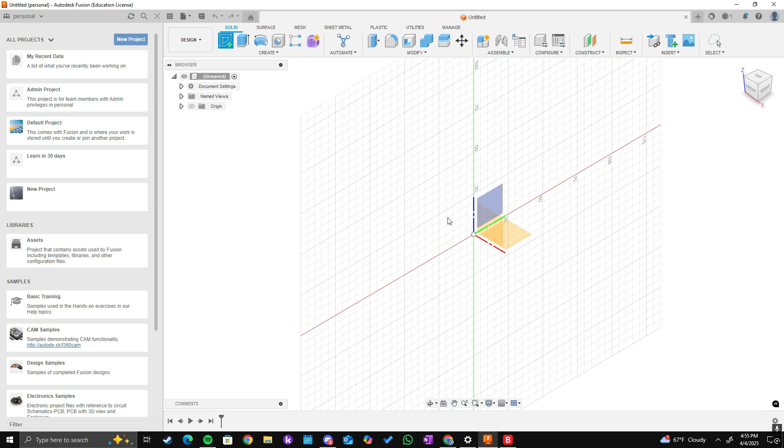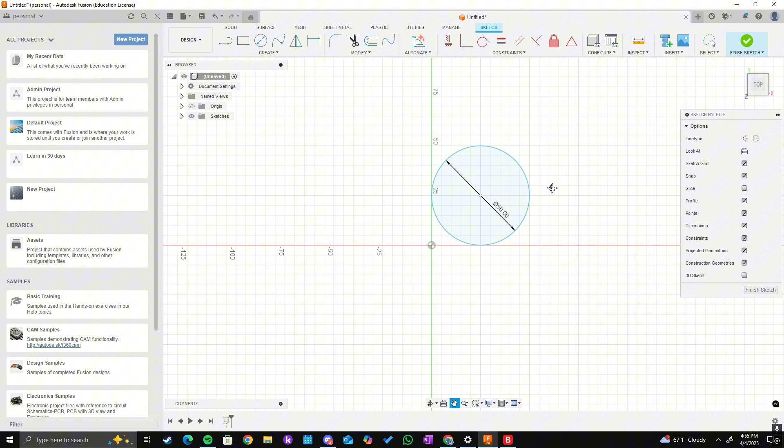Let's click circle. Because we're gonna be making a gear, we need the base circle. So let's plot our first point, and let's do 50 millimeters. There we go. Now we have our circle that has 50 millimeters. Now we could have gone through the sketch tab up here.

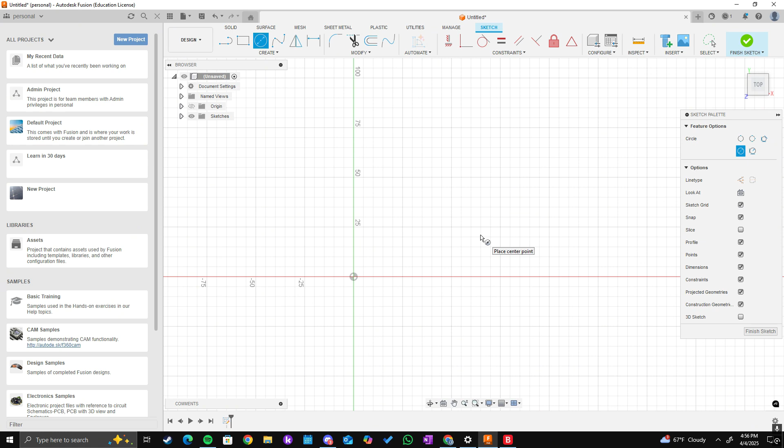However, a different way to do it, and honestly the way we can navigate this easily and quickly, is if we delete that, we can type S for search, and then we can type circle. We go down to center diameter circle, and then we can plot. So let's do the 50 millimeter circle. There we go. Alright, so now what we need to do is make the teeth of our gear.

So we click line, or we can search it, but since the line tool is right there, we'll just click through that. Let's plot our first points, and then let's do the other side. Now it's not perfect, it's a really quick ragtag tooth that we're making, but it'll do for now.

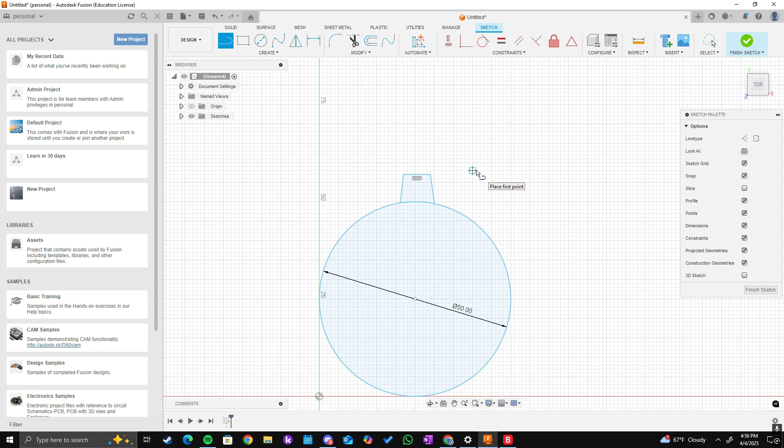Alright, so now you would have to essentially create all of these teeth equally in the same size at the same distances around this circle to make the gear, but that just takes a really long time and is going to be really difficult to do perfectly. So what we can do instead is type S, circular pattern, and click that.

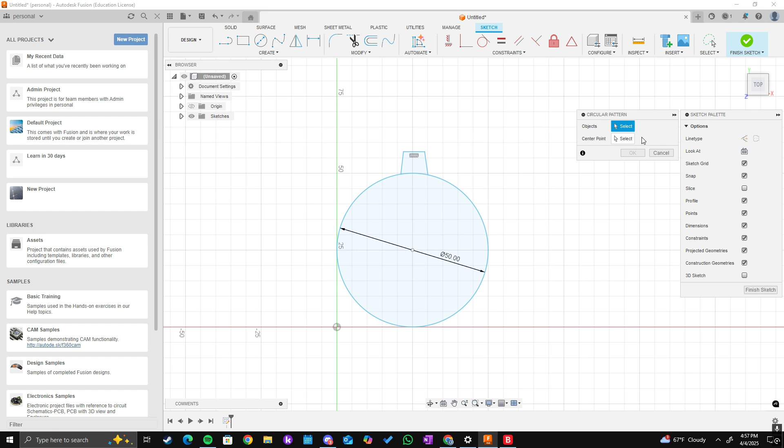So now we can select our objects. So we select this, and then we have to select our center point. So we select our center point over here, and now it shows 3 different teeth. A gear obviously is probably gonna have more, so let's delete that, and let's try 12.

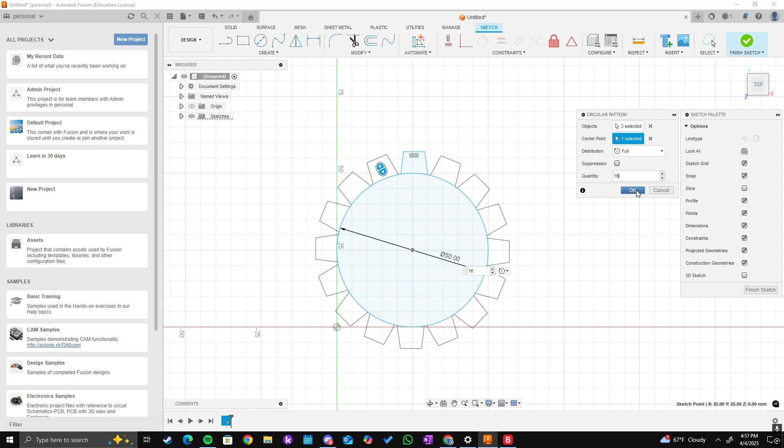Okay, so I think 12 works, but let's do 14. Alright, so 14 works pretty well. But I think we can add maybe a few more. Let's try 16. Alright, there you go, perfect. So now we click OK, and we have essentially 16 teeth on our gear.

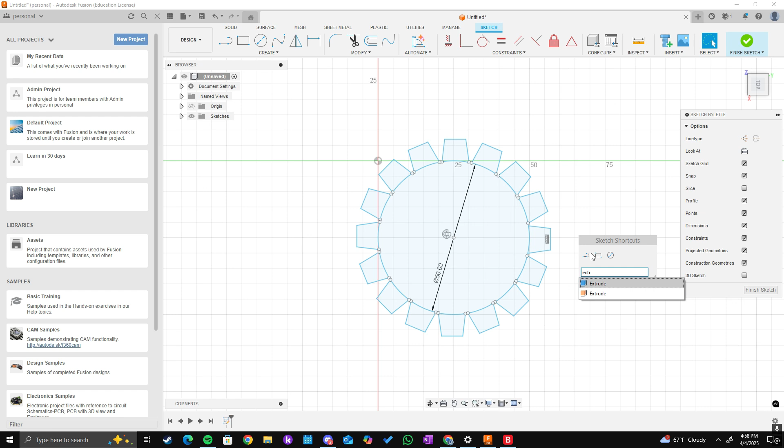However, you notice that this gear is only 2-dimensional, and you can't actually make anything with it. So we can fix that by extruding it. Extruding essentially takes it out and lengthens it. I'll show you. So we type S, extrude, right here. We click whatever faces we need to extrude. So we can just select the whole gear.

Wait, let's type that again. Extrude, select the entire thing, and let's type 5mm for extruding. We extrude 5mm. So we set OK, and there we go. Now we have our gear that's extruded out.

However, you notice that if we want to attach it to something, there has to be a hole in the middle for you to attach it to. So we can do that by two different methods. We can extrude a circle in the middle, but that's just going to take a really long time. So what we can do is we can do search and type hole. So we go to the hole tool.

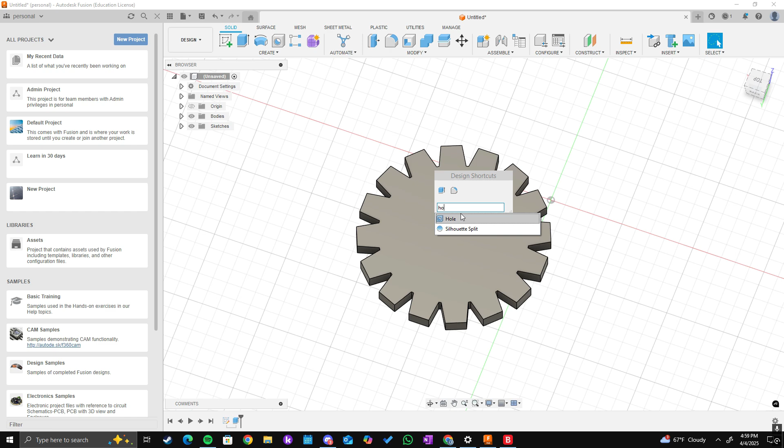Let's just select our frontal face. And let's hit hole. So let's go to the middle. That's the middle of our thing. And I have a preset of 5mm at a 25mm depth. You can set that to whatever you want, but it'll essentially create a hole through the entire thing. So let's go back to the top view, and let's hit OK. So now you can see that we have a screw hole to attach the gear to whatever motor or whatnot that you need to attach it to.

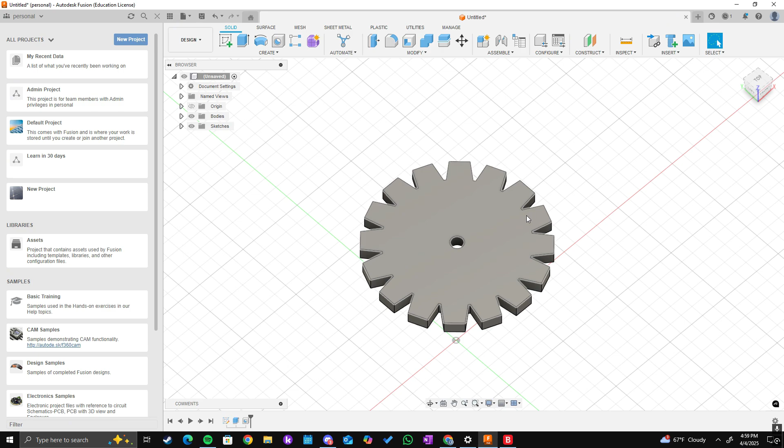So now you can see that we have our gear. However, let's say we want to joint this or attach this to another gear. We'd have to create a whole other gear then. And let's just do that really quickly. So what I'm going to do is I'm going to do the same process. Create sketch. Circle.

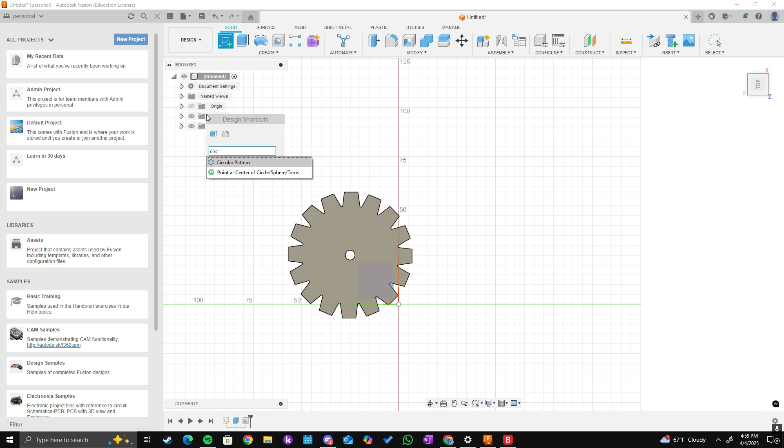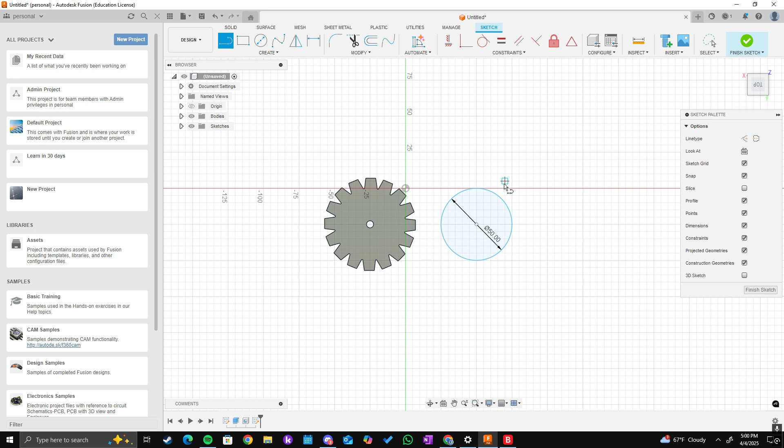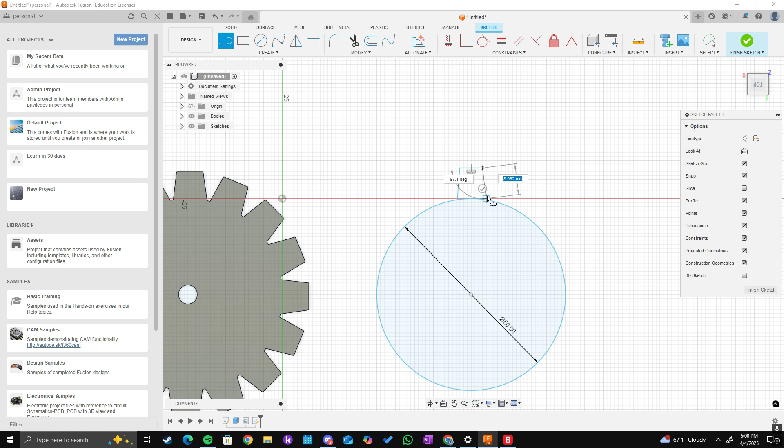Okay, so we select our plane. S, circle. So let's do 50mm. Let's make our teeth. You know, let's make it a little bit longer. Alright, there we go. Now we do the same.

Okay, so now I have both of my gears, as you can see. And so let's say I want to orient these to face forward and have them both connecting. So let's have the front view, and we need to move them and rotate them. So what we can do to quickly drag and drop them is we can go to our bodies, open our bodies, and you can see that these are created into bodies. If we want to easily manage them and move them, we should turn them into components. So we right click this, hit create component from bodies, go to our other body, create component.

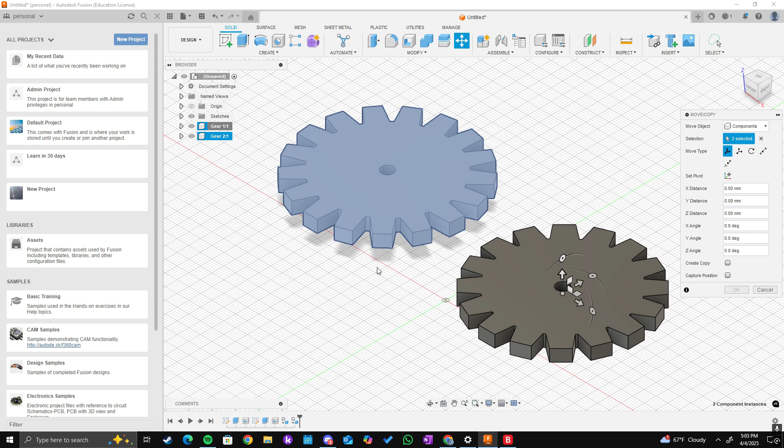So now we call this gear 1 and then gear 2. So let's select both of these. Let's hit unground from parent. That allows you to easily move these. So we hit unground from parent, then we hit move and copy. We rotate these 90 degrees, and let's move them up a couple millimeters. Now we hit OK. Now we can see that they're both facing front, right?

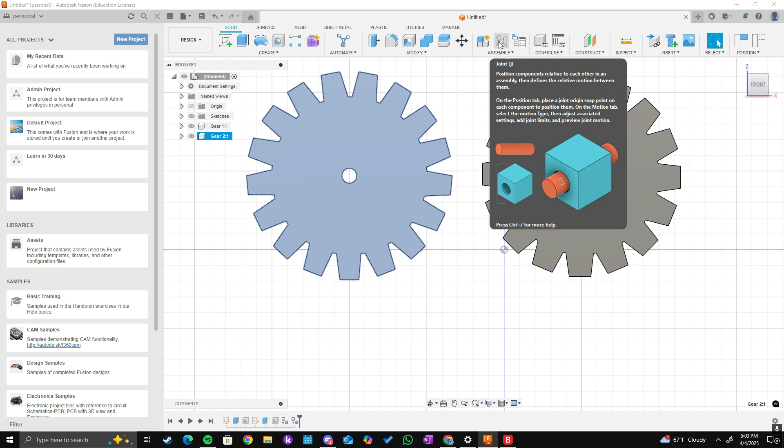But let's say we want to connect them together. Let's interlock their gears. So what we can do is we can select one gear. We can hit the joint button over here. Joint is a really useful tool. It allows you to connect two different components. So let's hit joint. Let's select our component. So let's select our point, and let's joint it here. And so it'll move to connect.

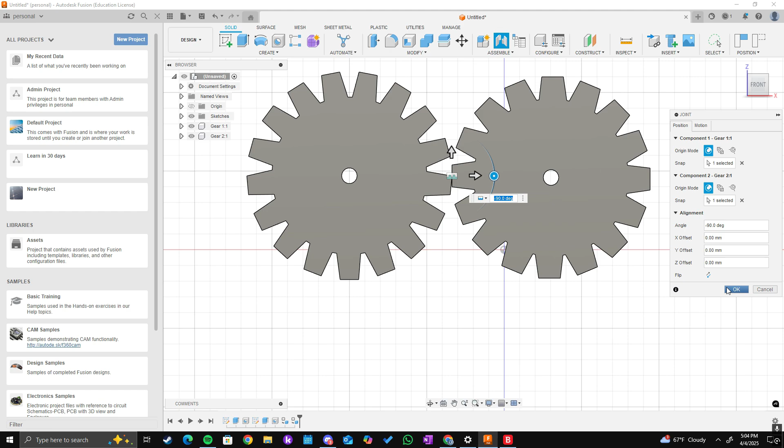Now obviously I haven't properly made these and planned these out, but once you do plan these out properly, you can joint them and you can make them so that they fit each other perfectly. And that's how we create good, high quality custom parts. So using the joint feature, we can check how well these fit, and while these don't fit really well, it's easy to connect them. And what this joint feature also does is when you move one, it'll move with the other. Alright, so let's move this. Clicked off of that. Alright, there you go. Damn. So yeah, you can see it moves with the other component.

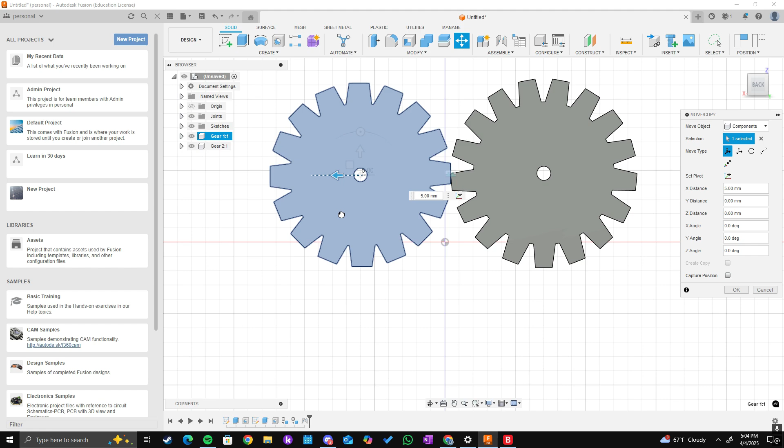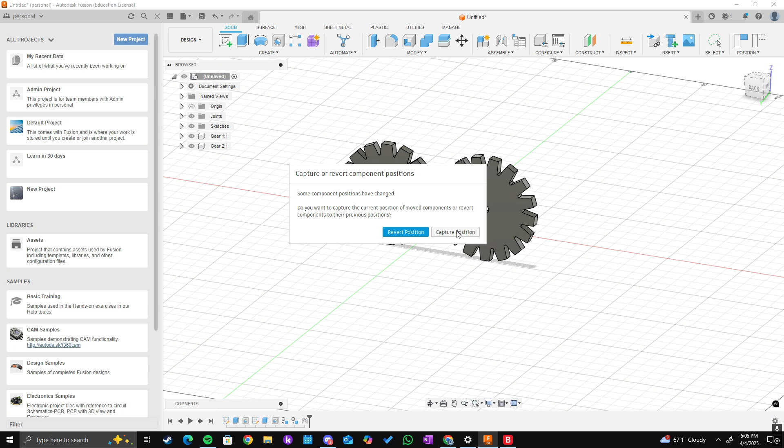So essentially what I want you guys to take away from this tutorial is that whenever you're finding or searching for a tool, instead of spending your time scrolling through every single tab, you can just hit S and then search for whatever you want. So we could search for like revolve. Now this is just gonna turn into some weird thing, but yeah. So revolving this is gonna be really weird and it's gonna be really annoying, but yeah, it's really easy to just search for whatever you want.